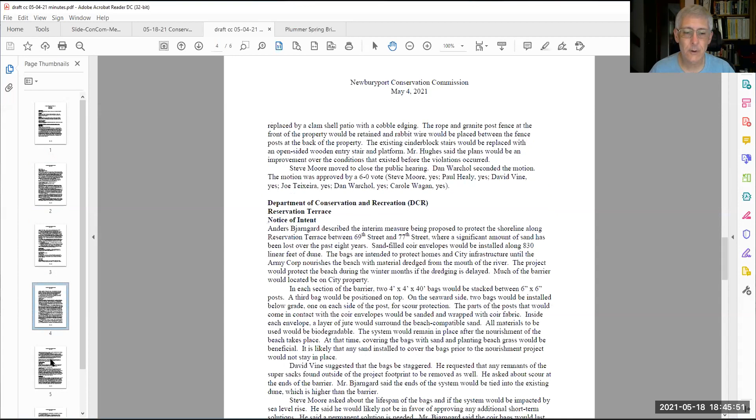The first item on the agenda is approval of the meeting minutes from May 4th, 2021. Anybody have any comments or questions? One thing I have is I talked with Julie earlier, Gloria Braunhardt, spelled B-R-A-U-N-H-A-R-D-T, Gretchen, so if we can make that change. I think I pasted it from the agenda. You did, because I'm the one who spelled it wrong. I apologize.

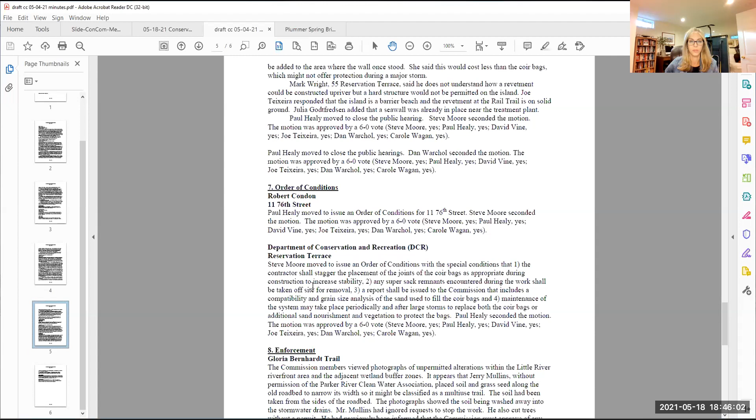Anybody else have anything? Motion to approve the minutes? Second. Roll call: Paul Healy, yes. Steve Moore, yes. Dan Warchol... oh, Dan's not here, duh. David Vine, yes. Ron DeCola... I think I have to abstain, I wasn't at the meeting. Is that right? I think you can. Okay, Carole Wagan, yes, and I vote yes.

All right, next item is Plum Island updates. We have anything? We don't really, unless David or anyone else can think of something. We don't have any updates in terms of permitting or projects out there, work proposed or taking place. Yeah, there's an MRBA meeting, I think it's next, the 4th, is it the June Friday? 4th, yeah, a Zoom meeting. Okay, yeah.

And I assume we haven't heard anything further on that project. I guess it's with MEPA now. Julia, do you know if there's anything further? Yeah, no, you're right, David, it's with MEPA. The ENF has been submitted. We've had comments on the notice of intent and on the ENF coming from Natural Heritage and from Marine Fisheries and some of the other agencies involved, including coastal zone management. And we put a special condition in our order that refers to the project being in compliance with any special conditions issued by other agencies. There really hasn't been anything coming from them of substance that we need to worry about, nothing that would actually change the project, so I'll let you know if there's anything like that.

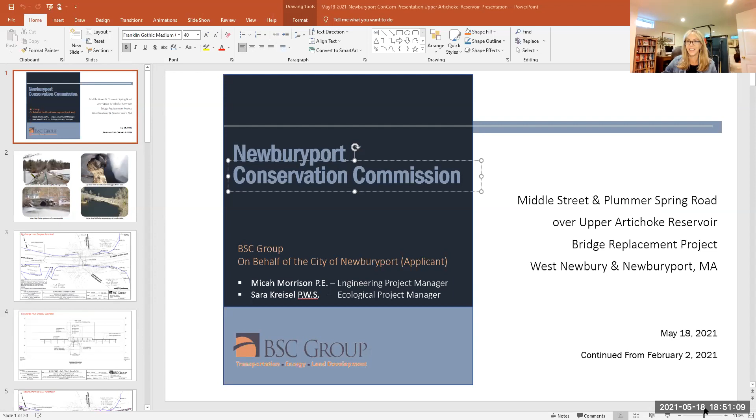I don't see anyone either. If I could ask you to go to the pictures, please. Sure. The project straddles the municipal line with West Newbury, and an NOI has been submitted separately for the work proposed in the town of West Newbury. The proposed project is for the replacement of the structurally deficient bridge crossing of Plummer Spring Road over the Upper Artichoke Reservoir, which was closed in 2018 to vehicular traffic due to undermining of the paved roadway foundation. West Newbury has secured a $1 million MassWorks infrastructure grant for the design and construction of the replacement, and Newburyport has secured a $500,000 MassDOT small bridge grant for the design and construction of the replacement.

The NOI before the commission has been filed for impacts to bank, land under water bodies and waterways, bordering land subject to flooding, the 200-foot riverfront area, and the 100-foot buffer zone to bank within the city of Newburyport as a result of the proposed work. The project was previously presented to the commission on February 2nd of 2021. Commissioners from both the town of West Newbury and city of Newburyport met us for a site walk on Sunday, February 7th, 2021. Following discussion with the commissions at respective hearings and at the site walk, the proposed updates to the design before you today are concessions that the communities have made for increased stormwater treatment along the proposed roadway, which will result in the additional protection of the reservoir.

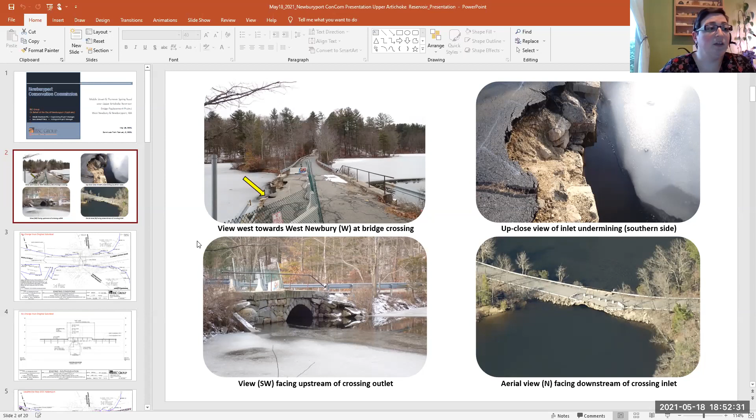The next slide, please. The roadway and bridge were originally constructed over the Artichoke River in 1891. The area was later dammed up and became the Artichoke Reservoir as it exists today. The bridge crossing itself straddles the municipal line between Middle Street, West Newbury, and Plummer Spring Road, Newburyport. The project occurs 0.4 miles west of the intersection with Turkey Hill Road, Newburyport, on an existing paved road, which is classified as a rural local road. The nearest house is more than 750 feet away. While the roadway is flat, removal of some trees along the slopes down to the reservoir will be necessary for access and construction. Next slide, please.

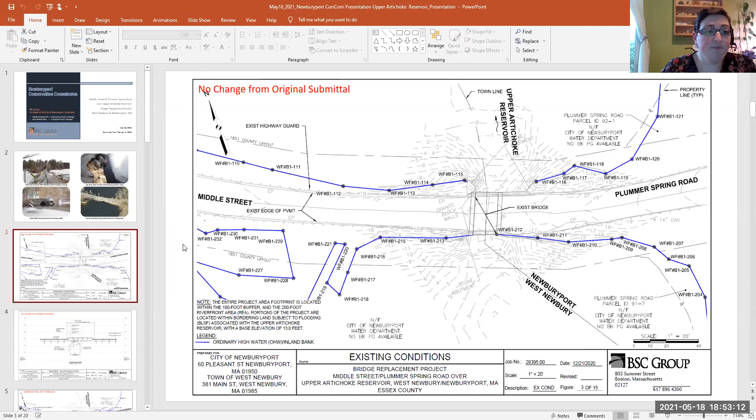The existing structure is a single span earth-filled stone arch and is approximately 14.3 feet wide, 13.2 feet high, and 24.2 feet long. Portions of the bridge, stone headwall, and southeast approach roadway have collapsed, and the paved roadway foundation is undermined. The upper Artichoke Reservoir flows northerly in an open water area and is bounded by protected forested lands. While bankful width for the Artichoke River is 28.4 feet as reported by StreamStats, the reservoir itself is much wider. The minimum width for stream crossing standards is 34 feet, but the proposed new clear span is 45 feet. Stream bed near the crossing is characterized by sand and cobbles with trace amounts of silt and gravel. The crossing is located within Zone AE for the 100-year storm event at and below the 13-foot base flood elevation.

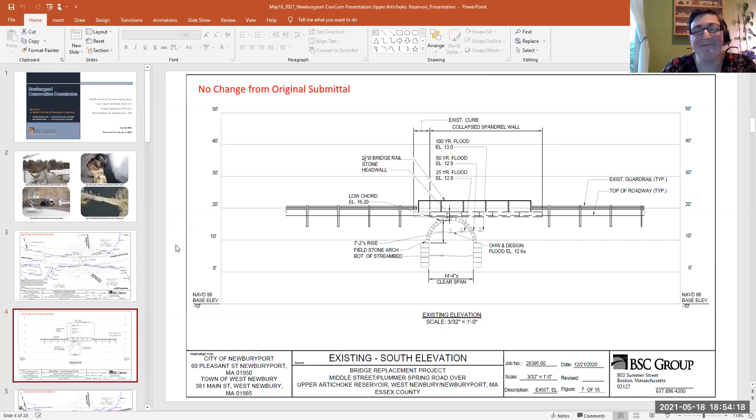The Artichoke Reservoir is a Class A public water supply and outstanding resource water. There is no rare species habitat in the project area, and neither the upper Artichoke Reservoir nor the river are EPA impaired waterways nor cold water fisheries. Next slide, please. The proposed project is characterized as a redevelopment project, but will preserve undisturbed areas adjacent to the crossing to the maximum extent practicable.

The proposed project design complies with the Massachusetts stream crossing standards as required for a limited project under the Wetland Protection Act. The crossing is proposed to be replaced by a precast concrete structure that will follow a similar horizontal and vertical alignment as the existing bridge, which will continue to have an open bottom with natural stream bed material. The proposed span length will increase from 14 feet to 45 feet. The overall width of the bridge will be 32.5 feet to accommodate safety improvements, including a sidewalk on the south side.

Next slide, please. In accordance with the MassDOT Bridge Manual for a rural local road, the proposed bridge has been designed to meet the 10-year flood frequency storm event, can accommodate the 100-year flood frequency storm event, and increases the hydraulic opening by a factor of 2 compared to existing conditions.

Additionally, while the low chord of the bridge will stay the same, the proposed roadway elevation will be 1.5 feet higher, which will help mitigate possible roadway flooding.

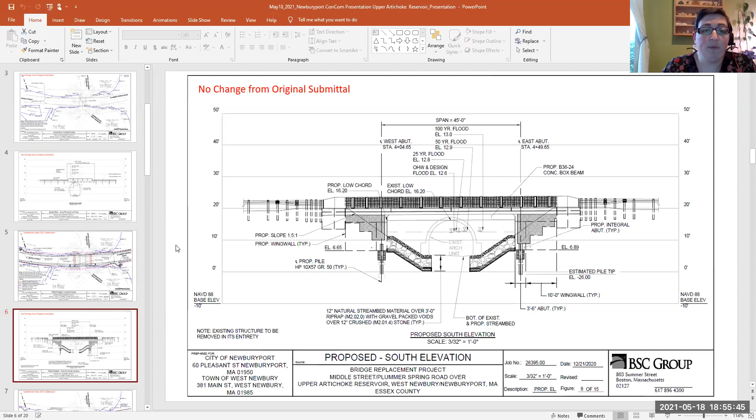The proposed bridge will have a slightly larger footprint than the existing bridge, which will improve the openness and span size over the reservoir, which in turn will provide environmental benefits such as improved wildlife passage and connectivity, and the increased hydraulic opening will better facilitate reservoir maintenance. Next slide, please.

The proposed permanent impacts to wetland resource areas have been minimized to the extent practicable, and all temporarily impacted areas will be reseeded with an appropriate seed mix.

As a quick summary, impacts to land underwater, bank, and bordering land subject to flooding will remain the same as proposed in the original submittal from January 2021, and will be restored, replaced, or even increased to the extent practicable within the project area. No BVW impacts will occur as a result of this project, as there are no BVWs in the project vicinity. Next slide, please.

Impact calculations to riverfront area have increased slightly, approximately 116 square feet with the new water treatment elements proposed, and now approximately 1,333 square feet of permanent impacts to riverfront area are proposed in Newburyport. An additional 154 square feet of temporary impacts are required also for construction.

Erosion and sedimentation controls will be installed prior to construction to protect the waterway and will be removed upon completion of the project once the site is stabilized.

Work will occur behind coffer dams so that the work can occur in the dry, but the exact methodology is up to the contractor. As discussed in our last hearing, the contractor is to prepare dewatering and stabilization plans, and they'll be required to submit them to the Conservation Commission for approval prior to the start of the work.

Existing conditions in Newburyport utilize country drainage for stormwater treatment, and the NOI submittal from January 2021 proposed no additional treatment. The municipalities now propose the addition of 2 deep sump catch basins on either side of the roadway, just before the ends of the retaining walls.

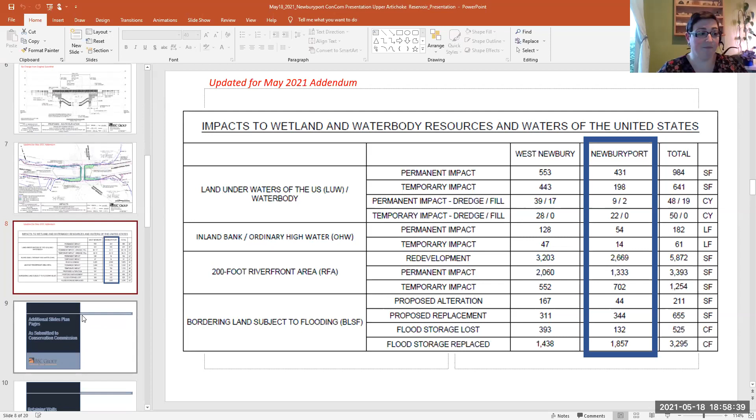And there are additional slides that have been presented as part of the plans if we need them for discussion purposes.

I have a question. What will happen to the wildlife that lives in that water currently? Because I know there's fish and I've seen swans, and I don't know, I'm sure there's other creatures.

I think it's currently 14 feet wide, the opening right now. 7 feet will be maintained. So there's actually going to be continual water passage allowable.

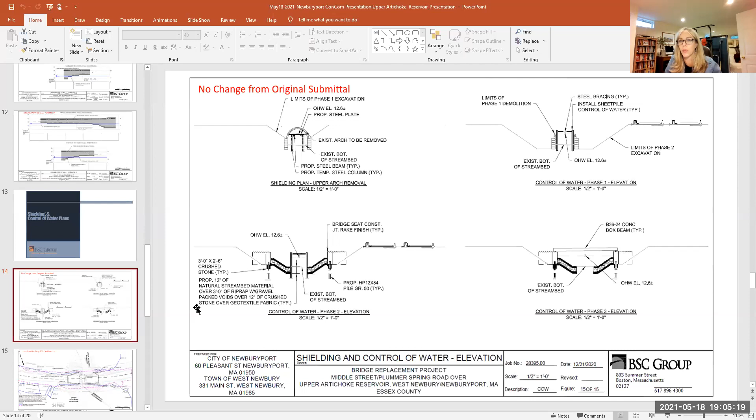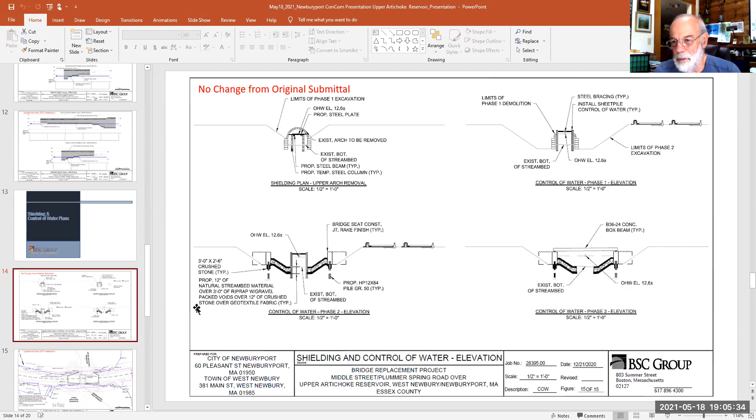No one's telling me that stuff. I don't know anything, I haven't heard that. It'd be interesting to see what that was about. Was it the reporter, or was someone quoted in Newburyport saying that? It was the reporter, I believe. The increase in construction costs was implied to mean Newburyport didn't have any interest in the project anymore, which I found hard to believe. Maybe there was just no interest in paying any more money. I can only guess.

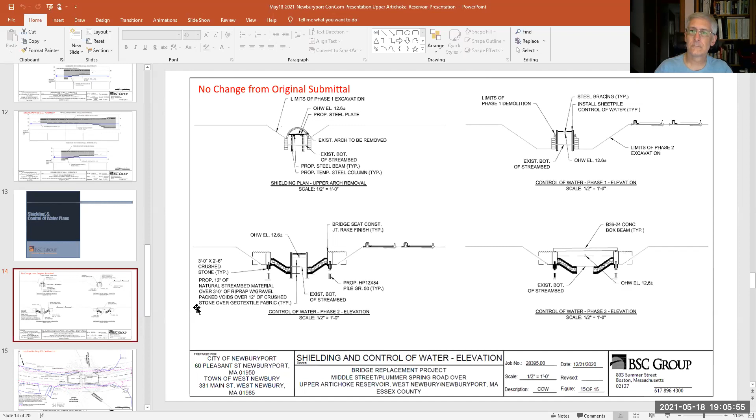Is there a graphic showing where the treatment units and the tanks are going to go? Yeah, proposed conditions is going to be a few slides up.

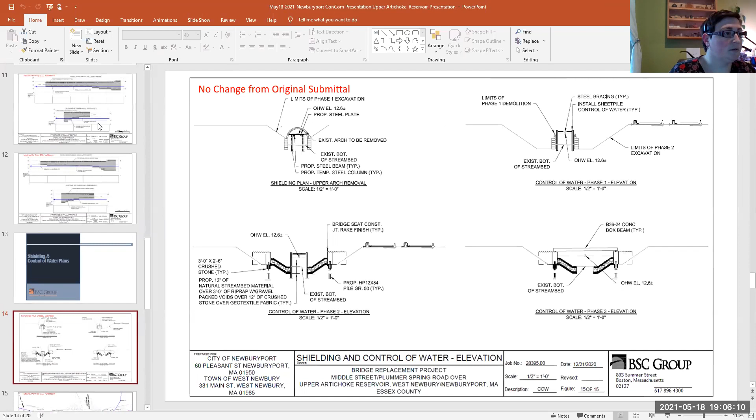One more. Okay, two more, sorry. I'm sorry, right, we there, go. Yeah.

There's 116 square feet of additional impact to riverfront area where that stone pad is. Yeah, okay. But that's the only impact, there's no additional impact to land under water, bank, or BLSF.

It would be above the water level. I don't know the exact elevation, but I can get that for you. Okay, so I'm just wondering what type of impacts the construction of that little zone is having.

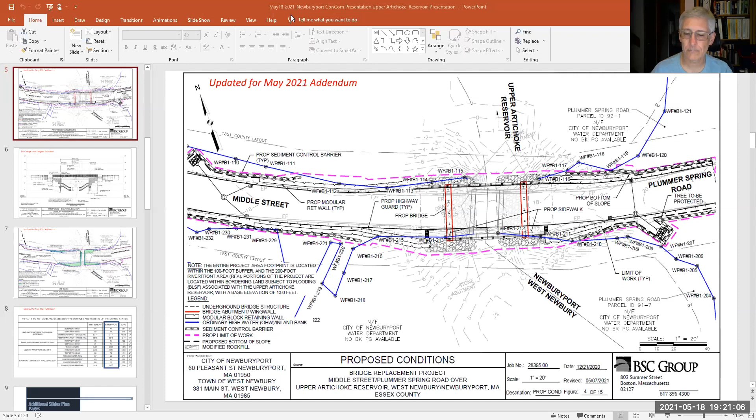Go ahead, Julie. We discussed the Gloria Braunhardt Trail at the last meeting and the work that was taking place up there, which shouldn't have been and was in violation. The notice of violation we talked about sending was sent out yesterday, so I put the date of June 1st for a response from Jerry Mullins. This will be on our next agenda. All right, so we'll do that next time.

Now, orders of conditions for the City of Newburyport, Upper Artichoke Reservoir Dam, notice of intent 051-1047.

They've revised the plans to show the water quality units and the discharge. The only special condition we discussed related to those new elements of the plan was about protection of the tree. The special condition I drafted: construction of the water quality unit shall not impact the tree to be protected as shown on the approved plans. If necessary to protect the tree, the location of the water quality unit may be adjusted, and changes submitted to the commission.